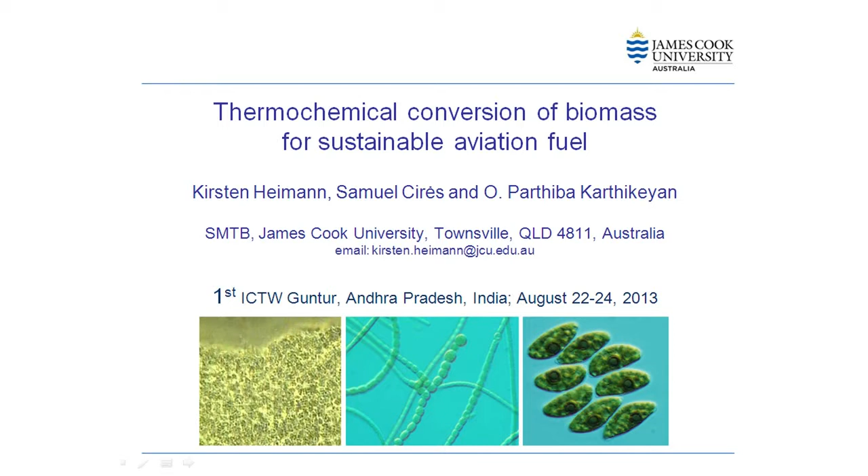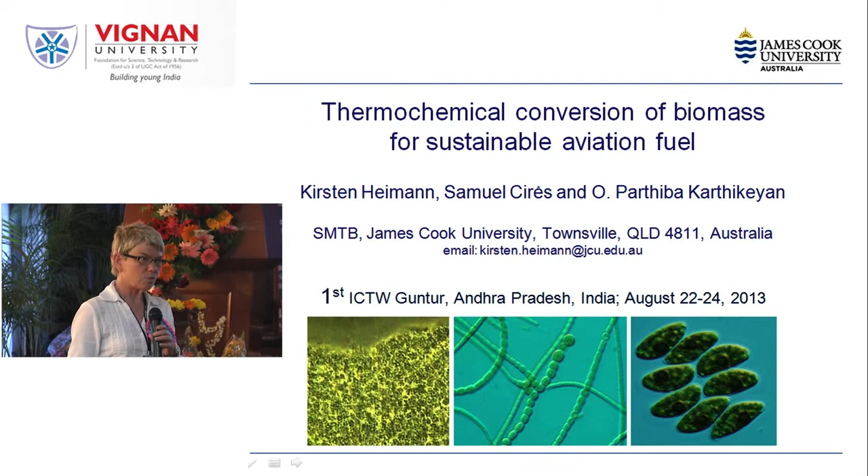I'm going to talk about thermochemical conversion of biomass for sustainable aviation fuel. That's not at all what I do day in, day out, but I've chosen this so I can narrow it down and get the numbers together more easily to see that there really is a dilemma between sustaining our economical way, because the economy works through growth, and there's a particular sector in this economy, the aviation transport sector, which is really stuck because it depends on liquid hydrocarbons whether it wants to or not.

So just to put it into context, we all know we live in a carbon-constrained environment. There's pressure growing on the government to do something about carbon pollution, but we're also hitting peak oil, whether we are already there or whether we're going to shortly, doesn't really matter all that much.

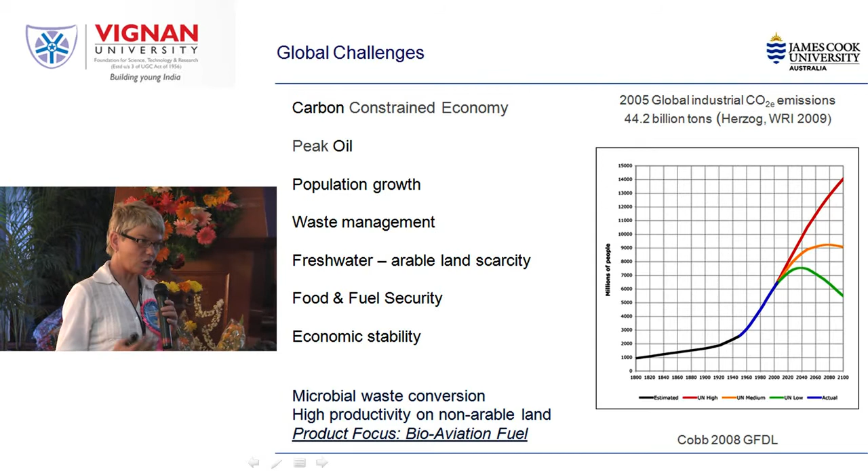What I think is our biggest problem is the unprecedented population growth and dealing with that in the long term. We are also seeing, through climate change, some changes in weather conditions and rainfall in particular. Now that will affect agriculture, it will affect freshwater supplies. So yeah, I guess mankind is in the doghouse at the moment.

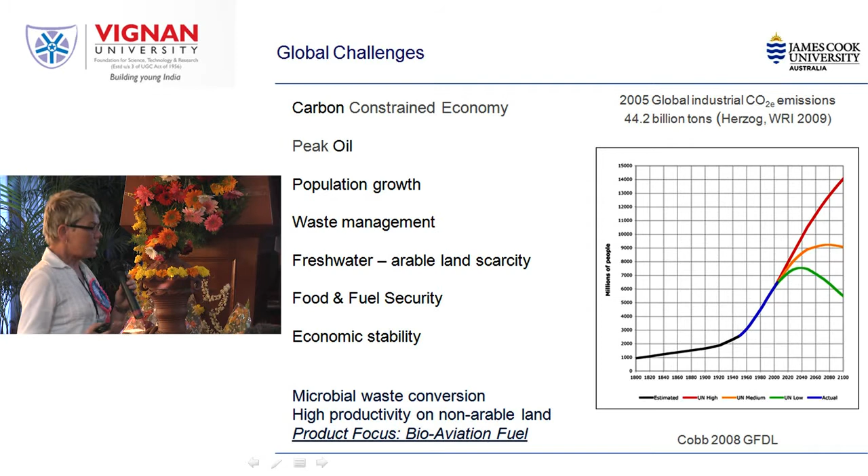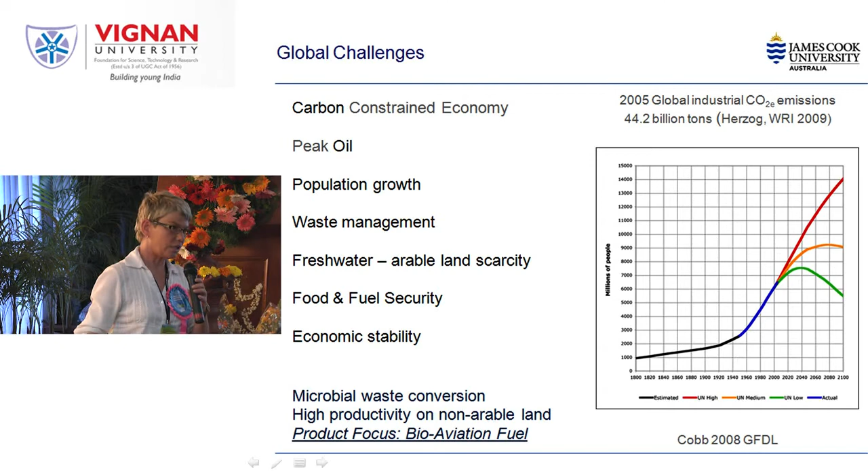So all of that, we know if things are scarce and not guaranteed and supplies are unstable, that is not good for political stability. It typically leads to war. And if we look back at the French Revolution, that's precisely what happened. Mankind had outgrown the resources, and ultimately there were squabbles over what was remaining.

So I think we have a biological solution that can help us a bit out of this dilemma. I'm not saying it's a miracle cure, but we know that the microbes - I know my little critters, okay, they're my pets. I've worked with them for 30 years, I know them by name, and I know their character. Some play nicely, others don't.

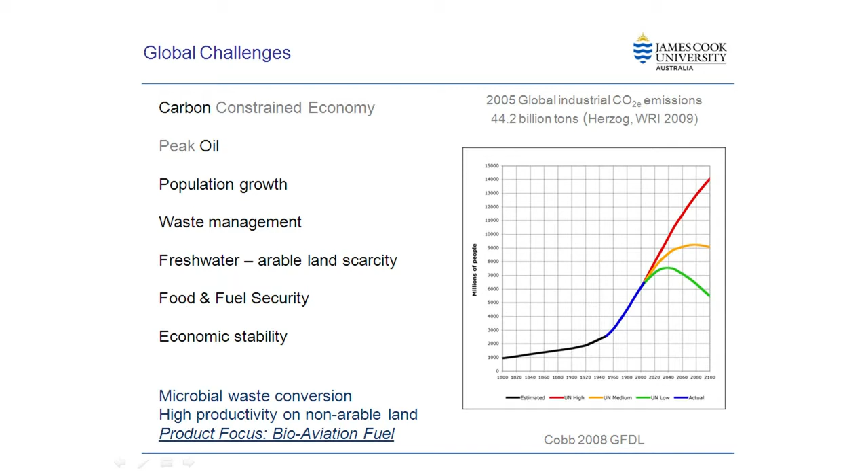But the ones we can play with are really productive on non-arable land, so there is no food versus fuel competition. And in particular, this talk is focused on the aviation industry. Students in this room, if you're in engineering and science, if you're studying bioengineering or biotechnology, you've made a fantastic choice, because that's where the future has to lie.

Now, I'm not going to look at this in great detail, this is only really to pretty it up, for some people who want the numbers. But the transportation sector in general doesn't actually contribute all that much to greenhouse gas pollution, so that's not really the concern. What is a concern is, for example, the aviation industry - it's only contributing 2 to 3%, which is only about 650 million tons of carbon dioxide.

But the growth, or predicted growth, of the aviation sector is what's really causing this dilemma. It's predicted to grow by 5% every year up to 2050, and it's going to carry, instead of 2 billion passengers, 16 billion.

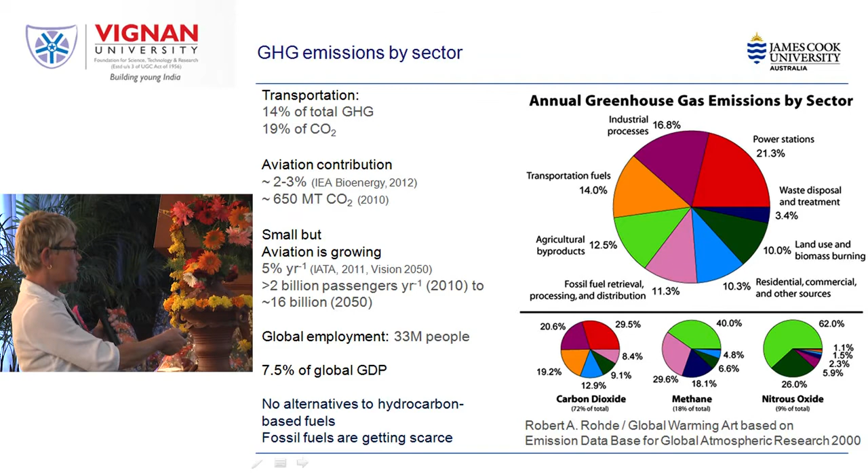The aviation industry has long recognized this, and as an industry, I can only congratulate them - they really want to do something about this. They have invested, and they've pretty much done it. They have come up with new designs and new materials which reduced greenhouse gas emissions by 82%. That is fantastic. They could have a little bit more optimization potential in terms of making airports a bit smarter in terms of air traffic management.

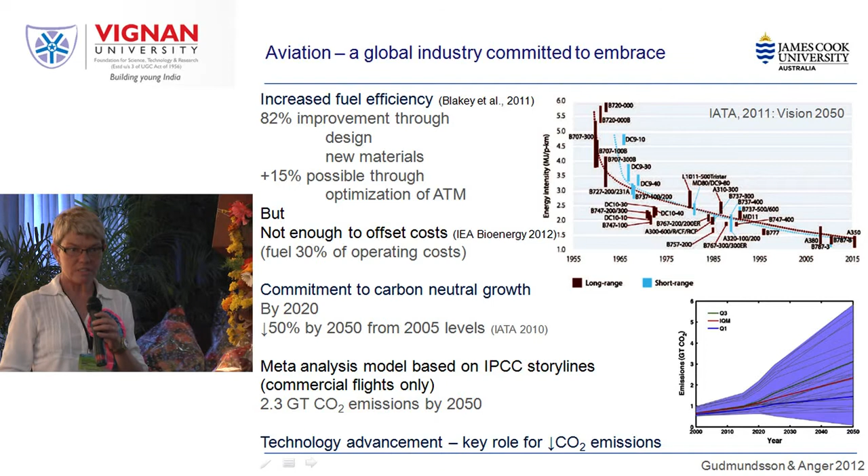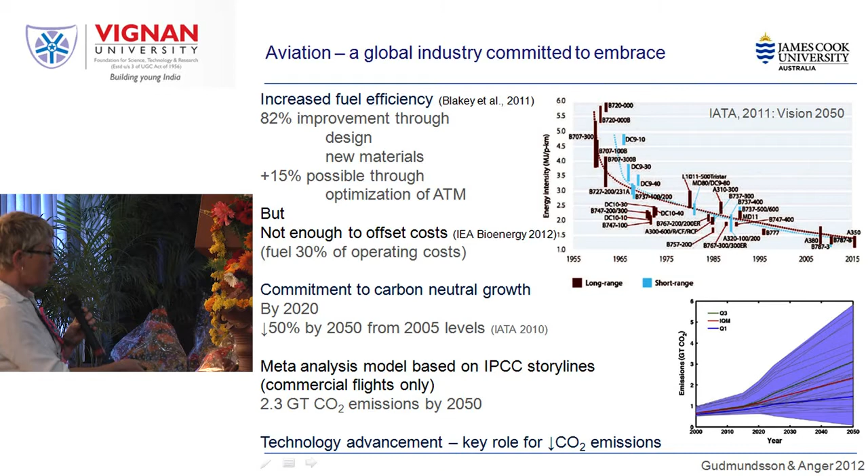However, that's all not going to help offset the costs, and 30% of operating costs are actually in fuel. The airlines, or the industry, have committed that they want carbon neutral growth by 2020, and I don't want to say it, but they're pushing things uphill. Ultimately, they really want to reduce their greenhouse gas emissions by 50% below 2005 levels. So they really need help to achieve that.

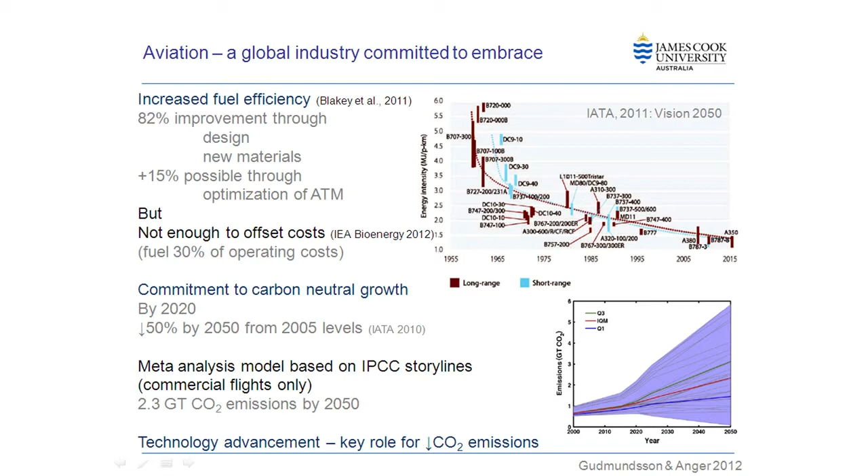So here are the reality predictions when you look at commercial flights only, not including the military, which doesn't want to be named in many cases anyway. You have 2.3 gigatons of carbon dioxide emissions by 2050, following IPCC storylines. So technology advancement plays a significant role in CO2 abatement, but it's certainly not the only one.

I don't really have to explain this picture, but this is my introduction to the biological part. What you see here is that when you're using fossil fuels, you're actually unleashing long locked-in carbon into the atmosphere. That is what we call pollution.

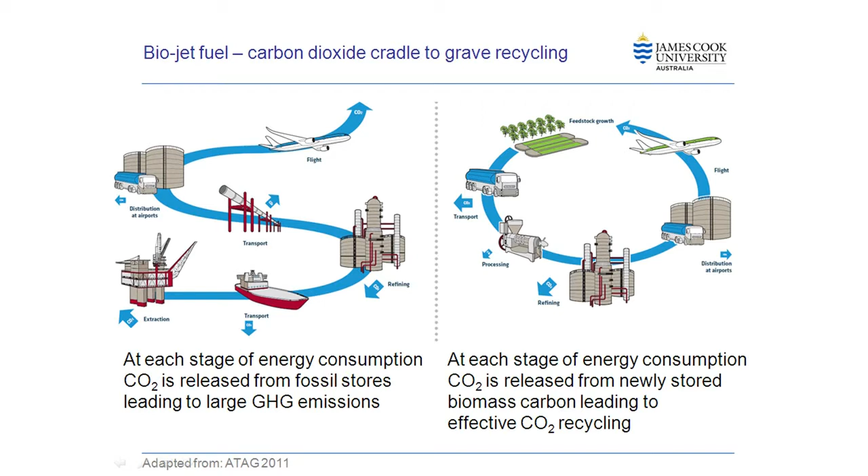If you look at this one here, you can see that you're using smart organisms. They use sunlight and CO2 to make their own organic carbon out of CO2 and sunlight. And if we are smart, we can exploit that to release or unlock short-term carbon, which has got this cradle to the grave scenario, which I think might help us.

So this is just to show you that things are really starting to get fairly tight. This is not going to be a scenario like it was 50 years ago, where the oil industry all of a sudden reboomed and recovered and everything was hunky-dory, and all the money for funding ceased subsequently.

These are all the new initiatives that were formed specifically to deal with how to get renewable and sustainable fuels into the aviation industry.

A great example here is our little neighbor country, New Zealand. Air New Zealand is in it, Boeing is in it, Qantas is in it, and Virgin Blue are in it. So they're all discussing what can we do, because one thing the industry has decided is it has to be sustainable, it has to be renewable, and it cannot compete with water or food.

So CSIRO said, and that's the most valuable sentence out of the whole brochure, bio-derived fuels are the only sustainable alternative for jet fuels. So that is where we need to look.

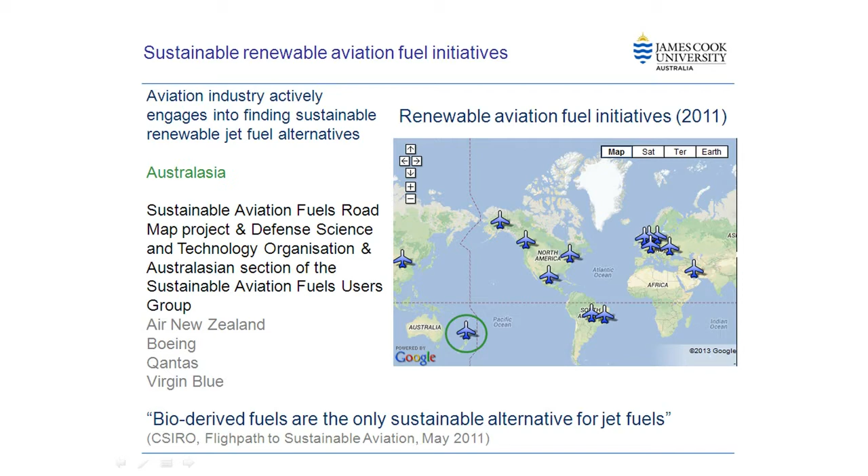Now here I'm showing you a very boring table, but what this table actually says is it can be done. Bio-derived fuels can actually meet the very, very stringent quality parameters of jet fuel.

So there are only two highlighted in yellow that have used algae at all in their mix, algal oil. So very scarce on the algae, which are my little critters, but they have used things like Jatropha and Camelina.

Were the main ones. This GTL in grey is gas to liquid. That is actually not a renewable or sustainable way of doing it, so I've taken it out.

So what you can also see is that the engines, only one engine was driven with biofuel, and in most instances, in all the instances, it was only a blend, so it was not a 100% biofuel. But you can see all the players here, the airlines and the partners, and here is where it all comes together.

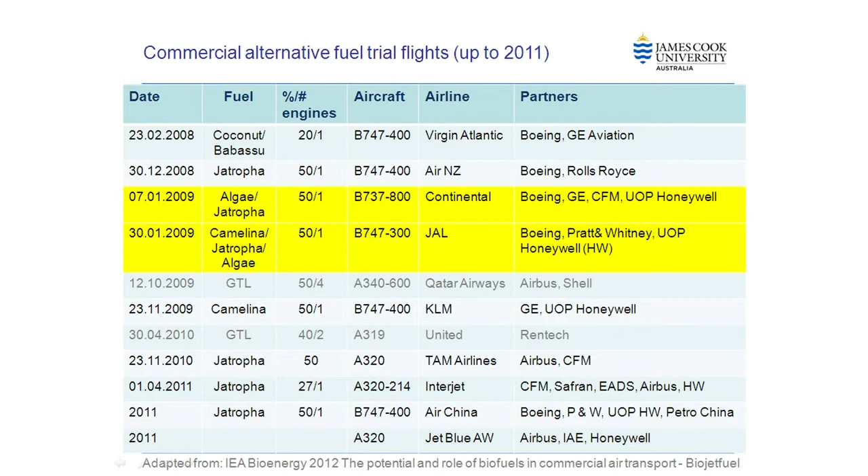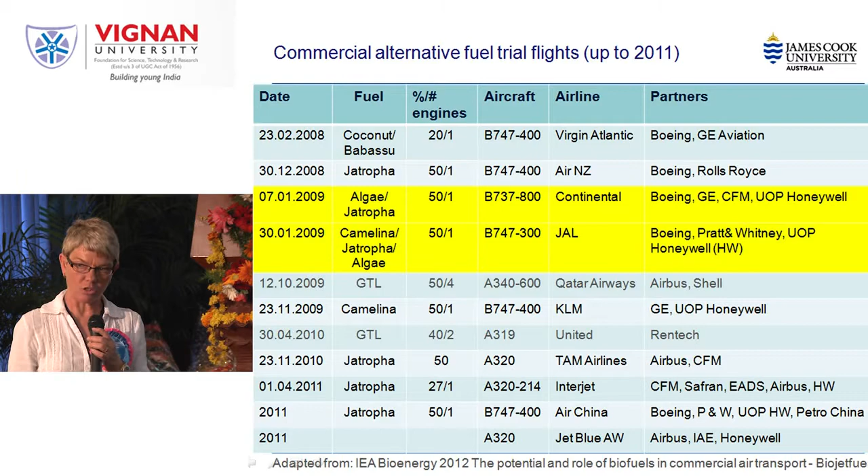If we want to make this happen for an industry, then you need more than biologists. You need engineers, you need chemical engineers, you need mechanical engineers, and you need excellent IT people, because communication is crucial in this.

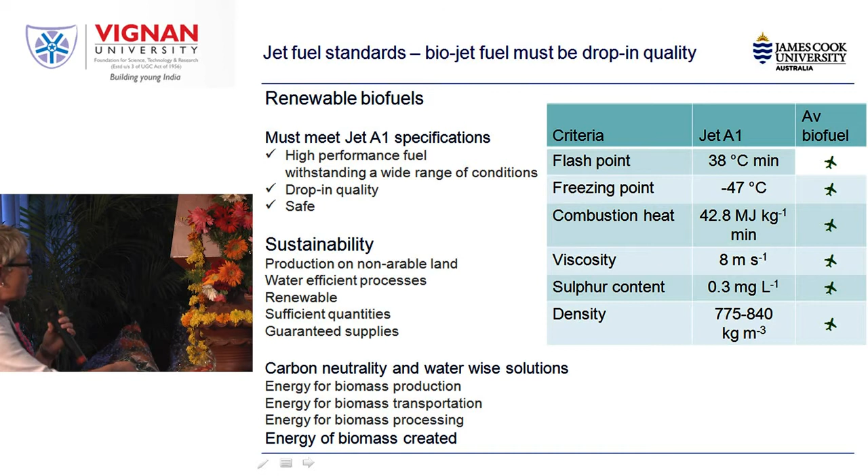So you can see I've put in, because I'm a child by heart, little green aeroplanes for everything that we have demonstrated we can do. So here is where I think the real crux lies, and that is the sustainability.

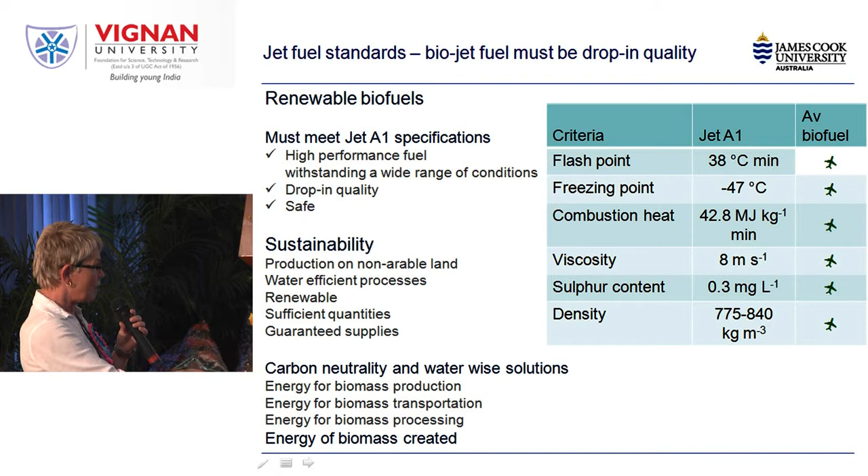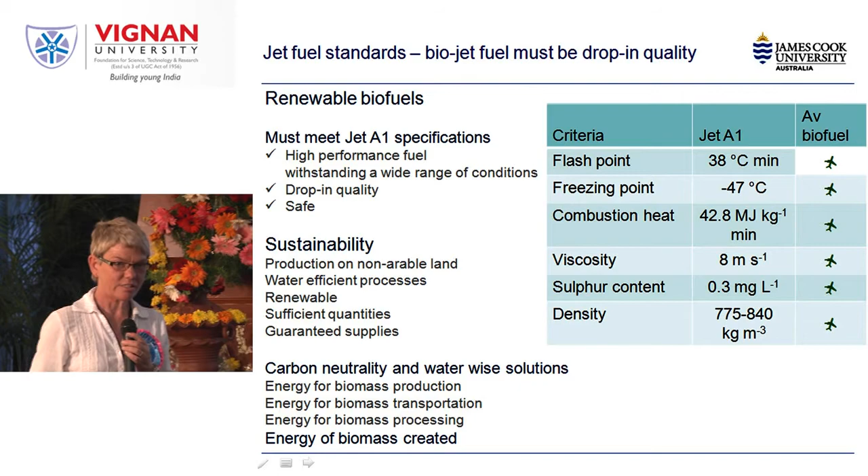And also the carbon neutrality and the water-wise solution. I know that I said in my abstract I would do a life cycle or techno-economical analysis, and I tried that, and I tried it, and I tried it very hard. And then I decided, geez, there's not enough data to even try it. So I didn't, because I couldn't.

So we have to really give it a go and get the data in order to model anything. There's just not enough there.

So here is the scenario as to what you can do in terms of conversion pathways. This is a very classical approach here, where you do a traditional extraction, you get your oil, you do a transesterification, and you get biodiesel. That biodiesel could be refined to jet fuel.

Now, our latest paper on algal biodiesel, microalgal biodiesel, through this route, it's ruled out. It's not techno-economically feasible. No matter how high the oil content of the algae you might use, it's still not going to be economically feasible.

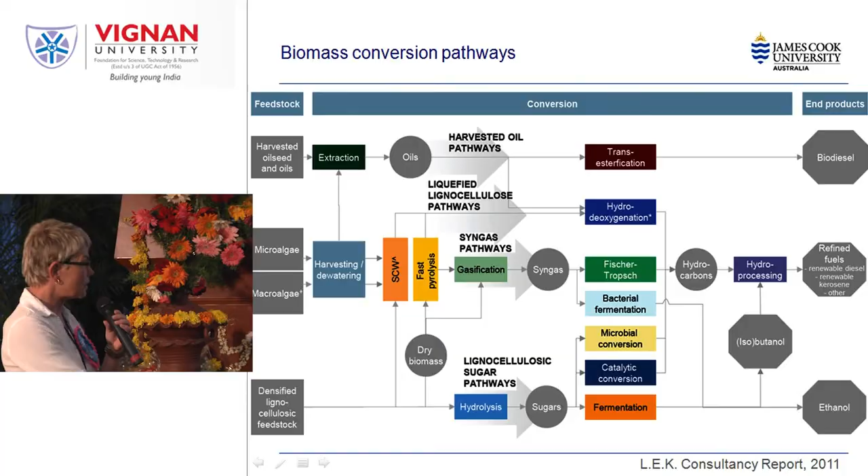Okay, and then you have other pathways here for micro and macroalgae, where you do some dewatering, you use something like supercritical water as the solvent, or you could do fast pyrolysis, gasification, syngas, Fischer-Tropsch. Now that all rings bells, right? This is not new. This was already proposed by Shell engineers, actually, a long time ago in the 80s. So it's not new, but what excites me about it is it can be done. That is the exciting bit. Now, whether it's going to be energy suitable and whether it's going to be water-wise, that remains to be seen.

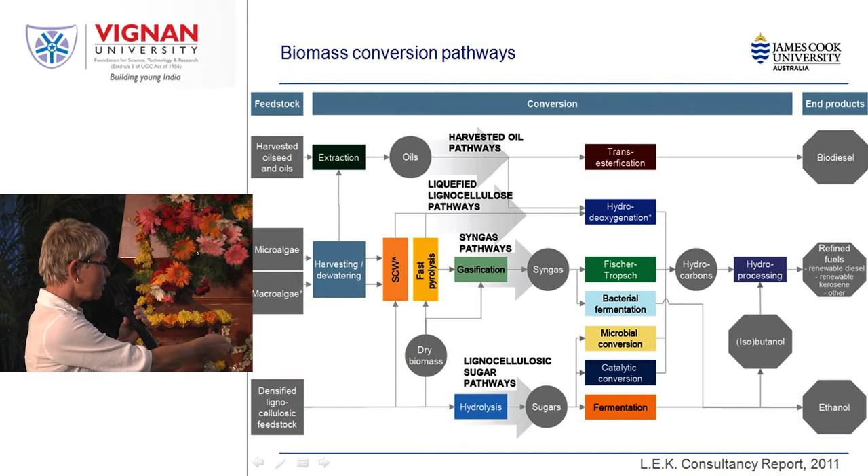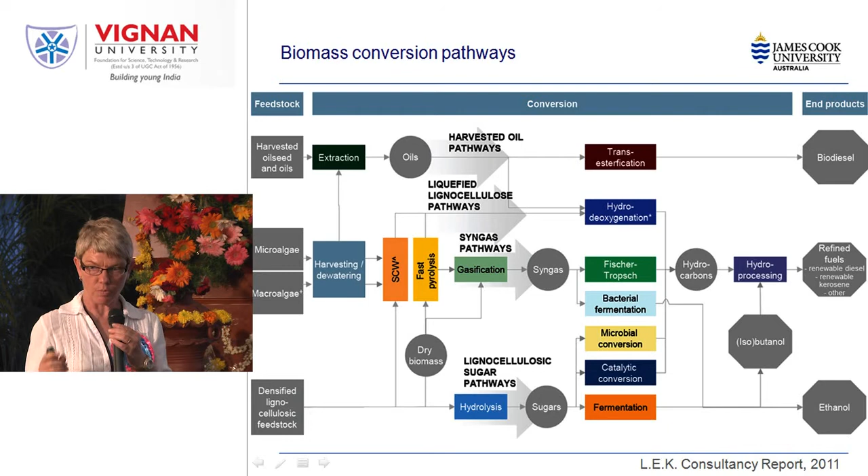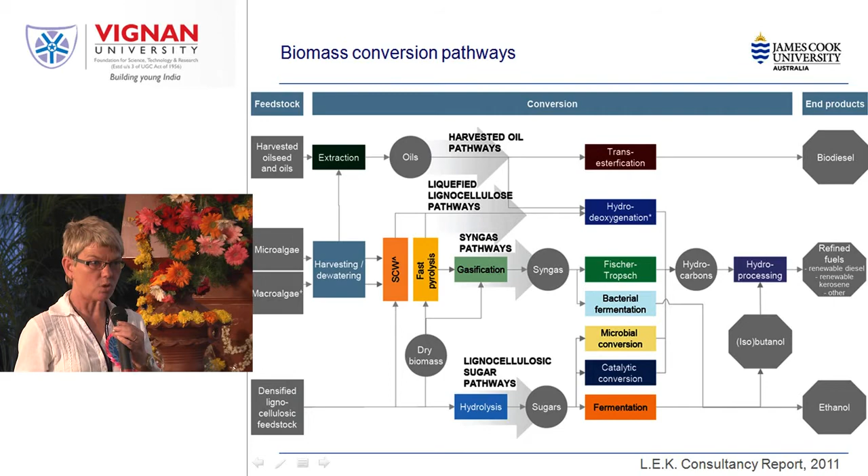One thing I really, really don't like is fast pyrolysis in this connection, fast pyrolysis when mentioning algae. Algae are aquatic organisms, okay? Even the densest culture, you only have 1% of your microorganisms, you're dealing with 99% water. And that's not even intracellular, okay? And moving water around and trying to get rid of water is one of the most expensive exercises, energetically, that we can think of. So what I do get quite excited about is the supercritical water, okay? Because for aquatic organisms, using water as a solvent, now that's clever, okay?

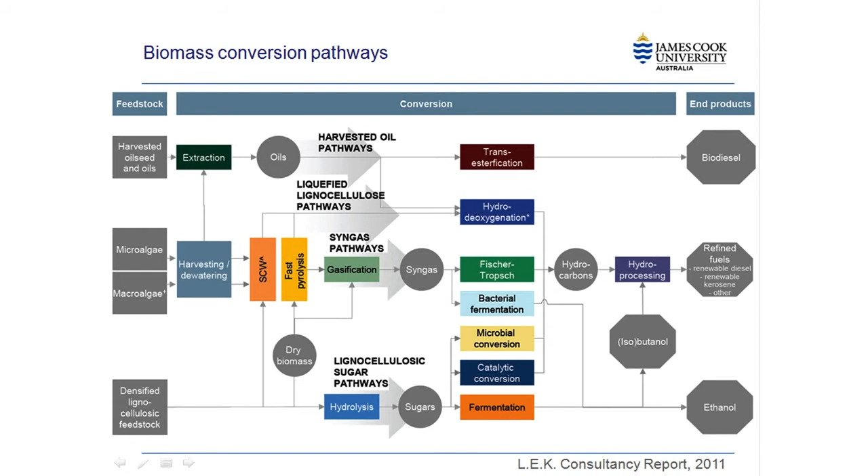And I'm not going into the rest down here, which are lignocellulosic pathways, but don't forget, we might have to mix and match, because one thing can't do it all.

So I'm not going to go into any detail here, but from the previous table of where we had done biojet fuels, these are the endorsed pathways, okay? The HEFA pathway, which is the hydroprocessing of natural oils and fats. So basically you have extracted the oil and then you do a hydrogen treatment, so you get rid of the oxygen, you make the biofuel more stable. And the BTL, biomass to liquid, through the Fischer-Tropsch conversion, okay? Now Fischer-Tropsch has always been stated it's not energy feasible, but I really don't know whether there's enough out there.

What is exciting again is that British Airways and Solena, okay, here are two industry partners, one that wants to fly on biofuel and sustainable biofuel, and the other one who wants to make a profit out of it, right? Selling the technology. What's the better driver than economics?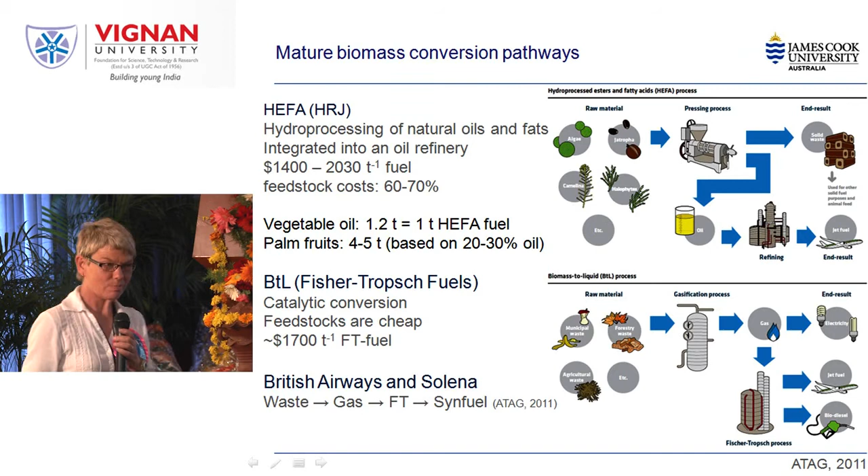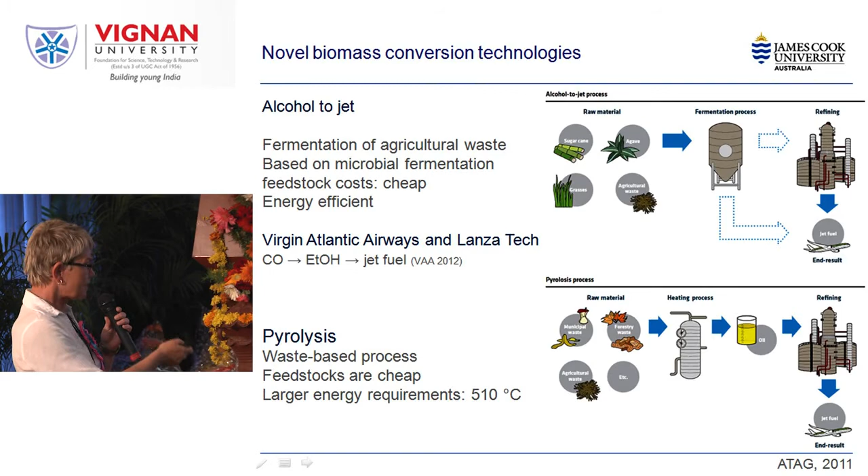So I'm not going to talk about this other than, there are some new conversion technologies on the horizon. Pyrolysis I would call upon in terms of lignocellulose conversions and stuff like that, not necessarily for the algae. But this ethanol conversion pathway that Virgin Atlantic and LanzaTech are looking into also looks somewhat interesting.

So, to summarize briefly, we have conversion pathways that we know will do the trick, right? They will deliver biofuels that suit. We know that even for pyrolysis, based on previous LCA analyses, okay, 68 to 77% of greenhouse gas emissions can be saved, even through that pathway. I don't know how true that is today, but the question has to be, so if we can do it all, what's limiting? And why aren't we doing it? Huh? The industry wants it, we can do it, and we're not doing it.

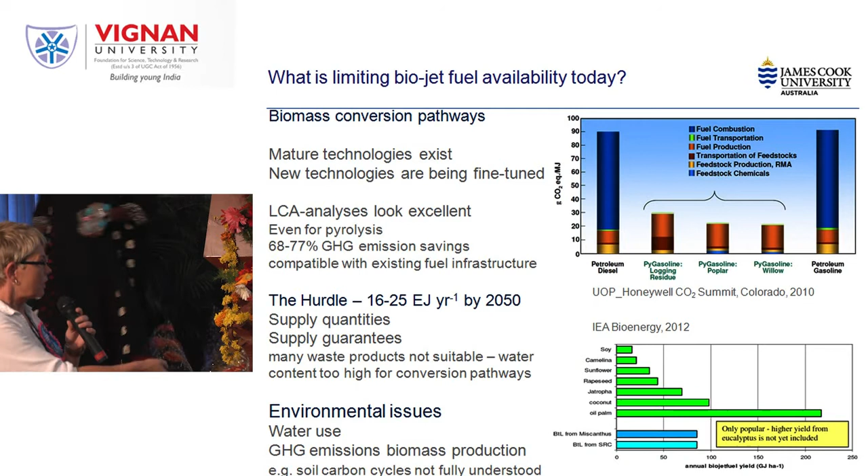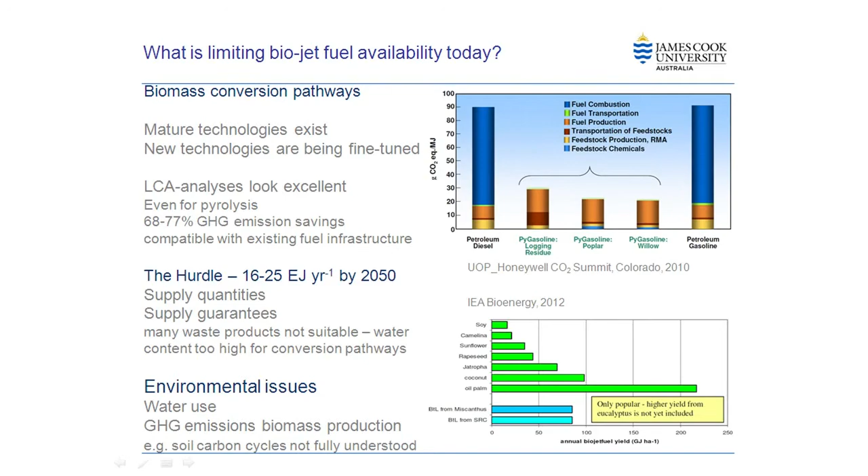Well, the hurdle is that we don't have guaranteed supplies. We cannot guarantee the quantity or quality of what we're providing, okay? And if you want to build an industry on something like empty promises, that's like a marriage, okay? It's gonna fall apart, it's not gonna work. So there are also some environmental issues that we really should be addressing on a research and development basis before we roll out an industry and then say, oh, whoops, sorry, we didn't consider this or that, right?

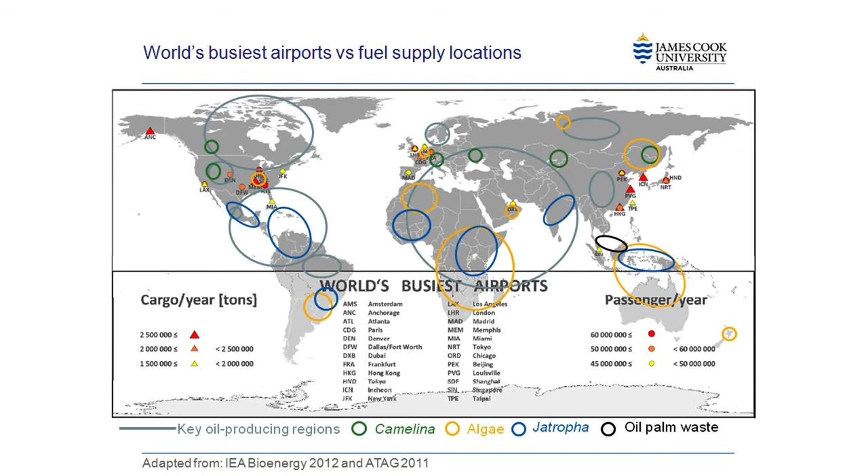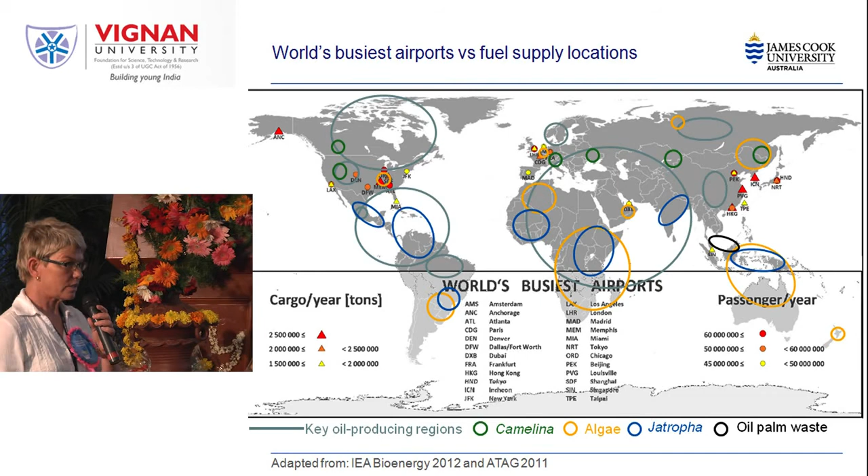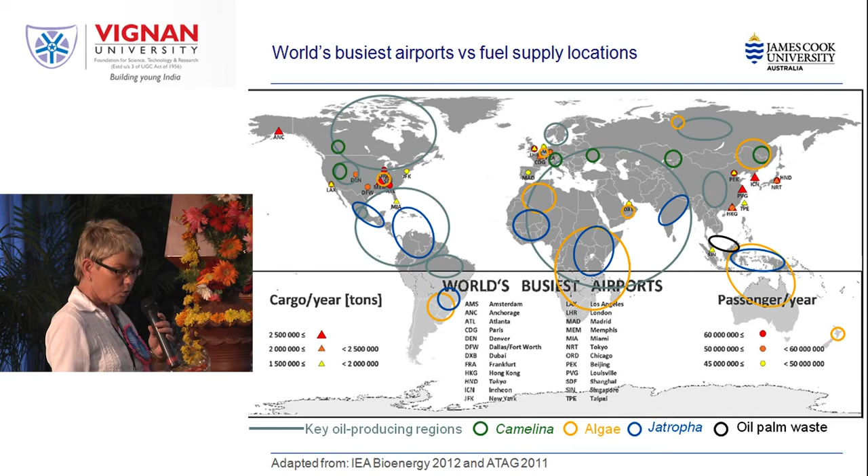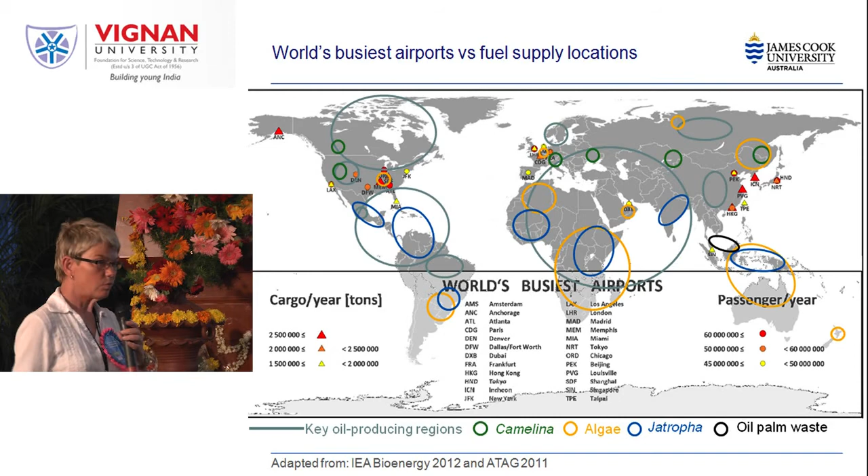Now here are my little critters, the algae. Now the good thing about the algae is they really can be grown on non-arable land. That means in countries with low population densities and tropical to subtropical. Here is the distribution for Jatropha. Jatropha has similar promise, so it would grow in regions where population densities are low. Now this is important, guys, because if we really want to reach the scale of fuel production that we need to reach, we have to consider land use, right? We need to build the industry where we can grow sufficient and not interfere with anything else.

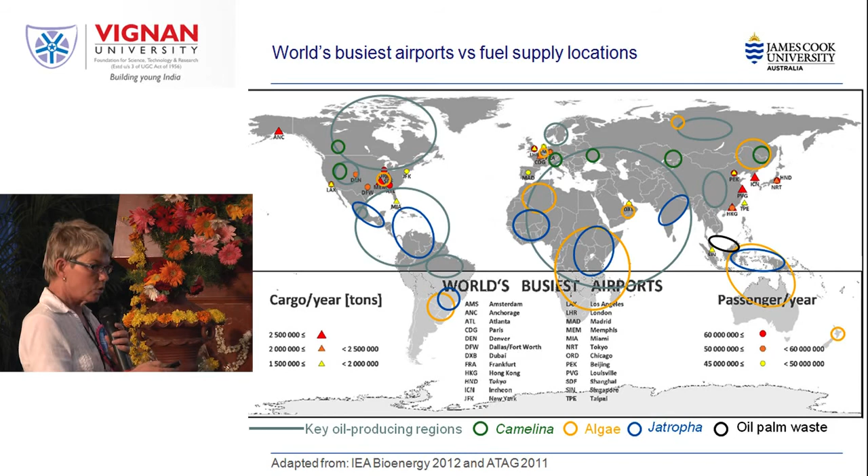Okay, so no one has really thought about this. And here we have something called oil palm waste. This is my little case example that I want to build on. It's situated in Malaysia, and I want to use it as an example of what you can do later.

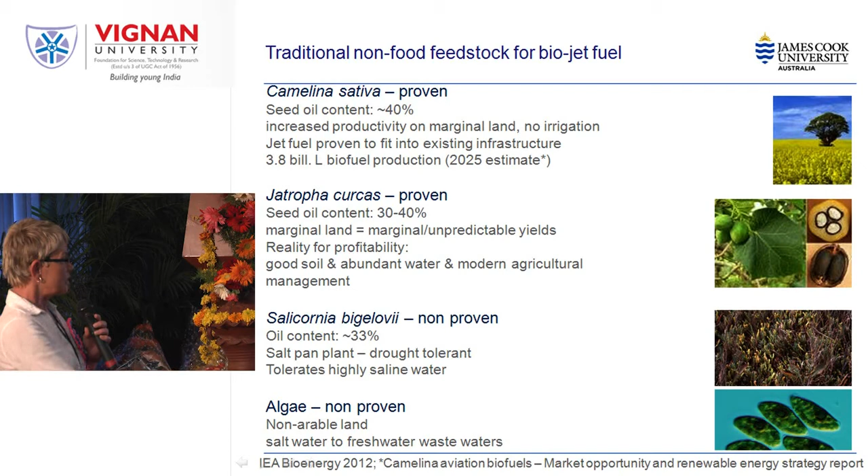I'm going to skip this one, other than to say camelina has been proven as a source for biojet, so is jatropha. These are two new players, and no, they're not really proven.

Now this is my project that I'm leading. Here we're taking problematic waste gases and nutrient-rich or metal-rich wastewaters from industries, and we're growing these bugs. Now, the algae are photosynthetic organisms.

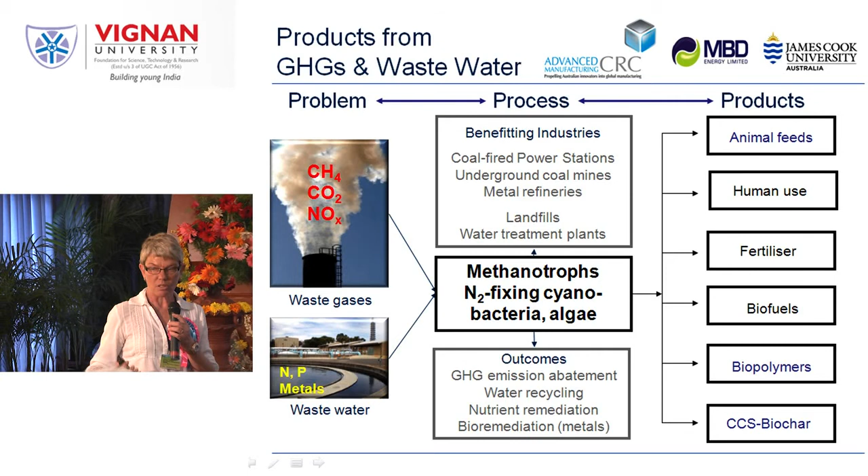In Australia, we have a lot of landfills, a lot of underground coal mines - there are large CO2 and methane emitters. If we want to harvest them, precisely like you would handle freshwater plants or macroalgae, you can physically handle them - you don't need the hugely expensive dewatering technology, and not the energy either.

And we have already achieved bioconcentration factors well over 200 - 284 was our best one - but I've used a biofactor of 100 for a calculation example.

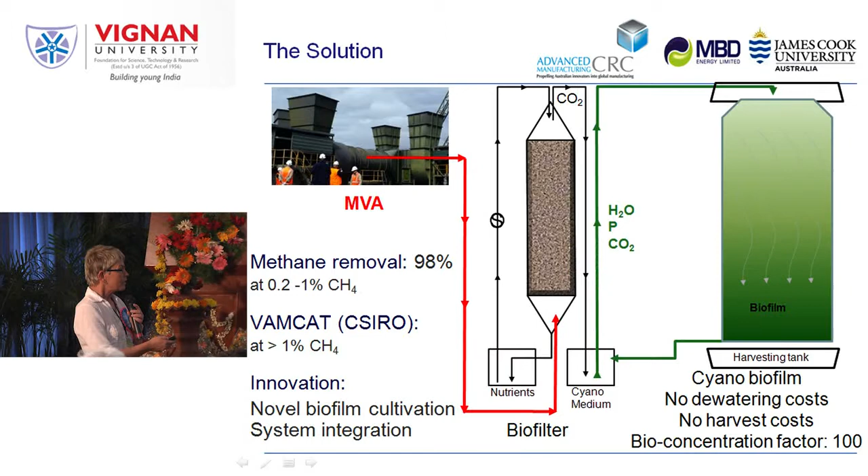I'm going to skip this. So what about the energy balance? Well, the energy balance with our system here actually looks very, very good, because we don't have to take the 1% of algae out of 99% of water. So this biofilm can go straight into a hydrothermal liquefaction process.

Now this is data from CSIRO, and it just shows that even the worst performing microalgae still outperform other sources of biomass for fuel.

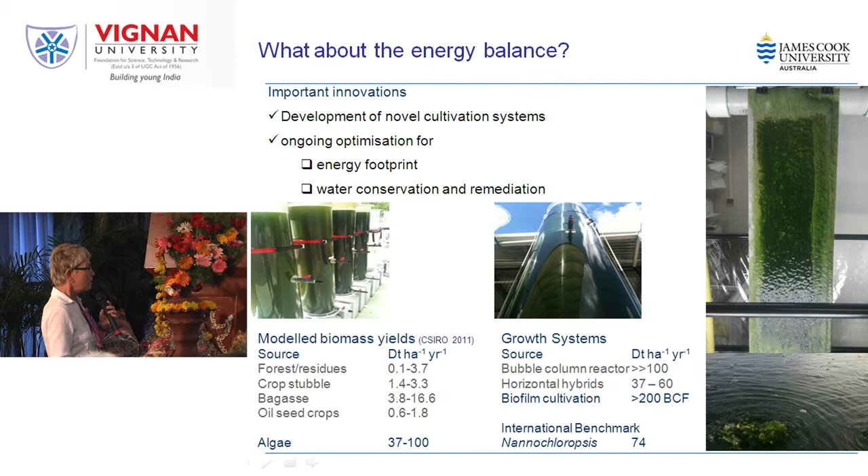Now this slide is important, because I'm kind of getting sick of people not giving credit. In the 1980s, the Shell Laboratory had an R&D project running, and they actually invented hydrothermal liquefaction - we call it these days supercritical water. And their hydrothermal liquefaction unit actually operated subcritical, which is important. They also did a techno-economic evaluation of this HTL process, and it all turned out really good in the 1990s.

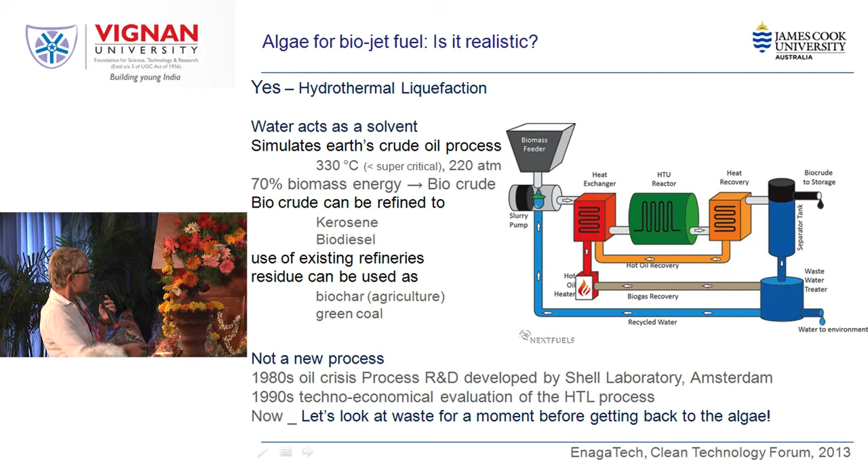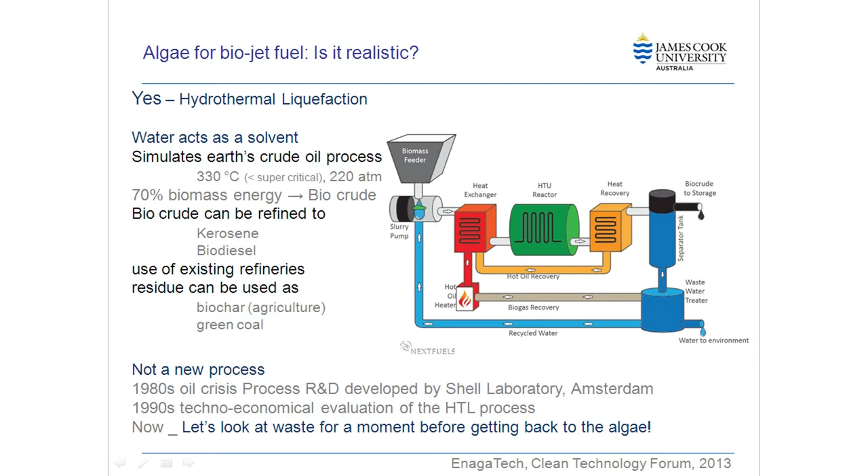Yeah, a lot of energy products can be derived from it through this process, and 70% of the biomass can be converted into energy biofuel. What you have to take into account is water is good, right? In all other conversion technologies that rely on dry input, water is bad. And this is why it's important.

Here is Malaysia. Malaysia has 5 million hectares under palm oil. The rainforest is gone, pretty much, or large parts of it. But we are only using a small amount of the biomass. The rest is waste - what a waste, right? It goes up in the air, they don't know what to do with it. It's waste, right? So why not put one and one together?

Because this waste is so high in water - it has 60% water content - hydrothermal liquefaction would be perfect for it. Why not make at least a low-grade fuel before doing nothing with it? So let's see whether we can actually make Southeast Asia the Arabia of tomorrow.

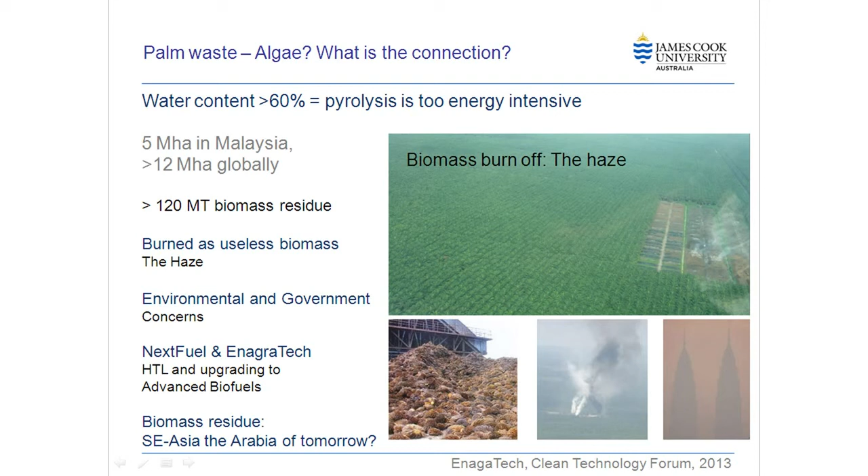We have the palm oil plantations, but sooner or later I think we're either going to switch to Fischer-Tropsch fuels or something, and then the palm oil plantations - who's going to look after them ultimately, right? But adding into the mix brand new sources of carbon, I think, will cut the balance, and I hope it will keep the aviation industry flying. Australia depends on it. Thank you.